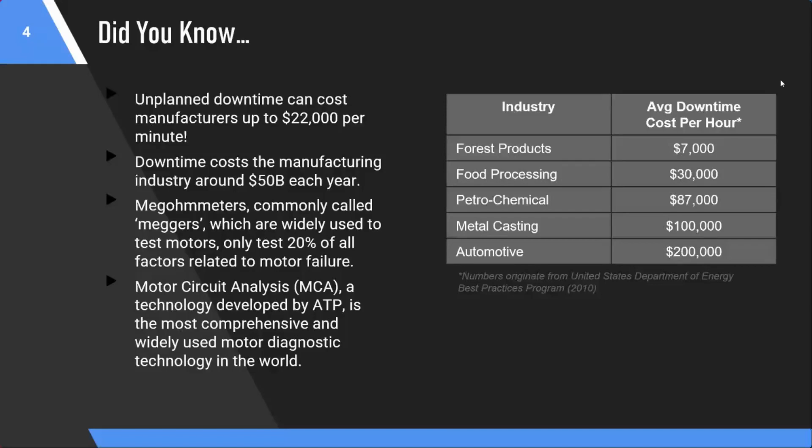So why test motors? Well, as we've said, they will fail. And they can fail at the most inconvenient times, as you know. So clearly, troubleshooting is a very key area that we like to address. It's a common entry point, but there are other areas that are really critical to your business that you may not have potentially looked at. And one of those areas is incoming inspection. When you receive motors that are new or perhaps repaired, testing those motors first can be really, really valuable.

Then obviously we have our PdM condition monitoring program. Many facilities are looking for the benefits that type of program gives. And then we have the whole area of actually improving the commissioning process when you're putting in or taking out motors into your system. We're also looking at some really important cost savings that you can have with regards to energy usage. You've also got the important area of health and safety for your people at the plant. And those areas are all really critical and all have a huge payback to your business.

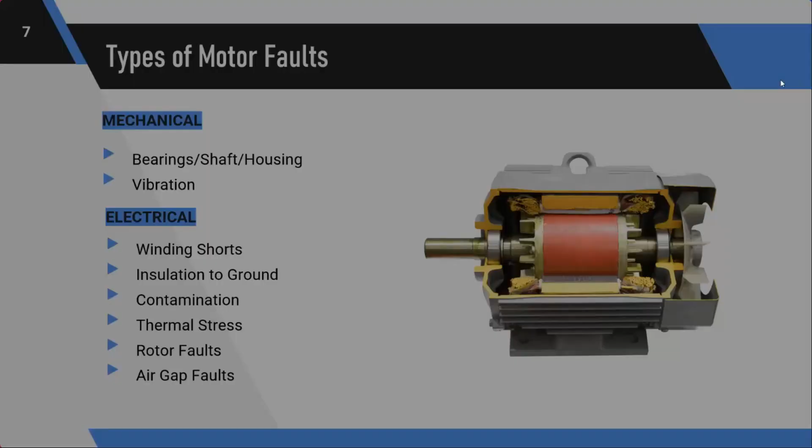Now, when you get to the electrical side of it, the standard that many facilities have been operating with has been the good old insulation test, because really at many facilities, the primary focus there is: is that motor safe? So the insulation test, the ground wall, is a basic safety check, but that doesn't help you in finding those core-to-coil, turn-to-turn type faults. And that's where motor testing using motor circuit analysis that the AT7 is using is really going to help you.

So we can see with MCA, as I said earlier, core-to-coil, turn-to-turn type faults and phase-to-phase. And we can also do the insulation test, so we can see ground faults as well.

So this chart here gives us a good flavor of what is done at many facilities. And as you can see, the green gives you an indication of an early developing type fault. A yellow indicates that it's a late stage fault. And you can see that there's a lot of areas where you are really missing out on early stage information.

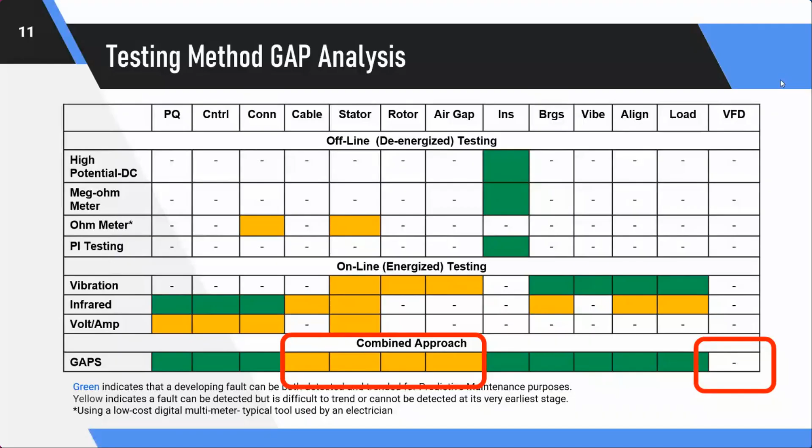Now, if we go to the method where we would be using both de-energized, that's MCA, motor circuit analysis, and electrical signature analysis, all of a sudden we have a larger area of early fault finding. Now, if we focus in on the MCA line, here you can see that we can look at connections, cables, we can look at the stator, the rotor, air gap, and so on, and see these early stage developing faults.

Now, that's something that you're not going to be seeing with your insulation tester, and it's certainly something that if you're using polarization index, PI, and so on, it's not going to do anything for you with regards to those developing core-to-coil and turn-to-turn faults. Really, they are very much looking at the ground wall insulation. So MCA, right out the gate, gives you this developing information.

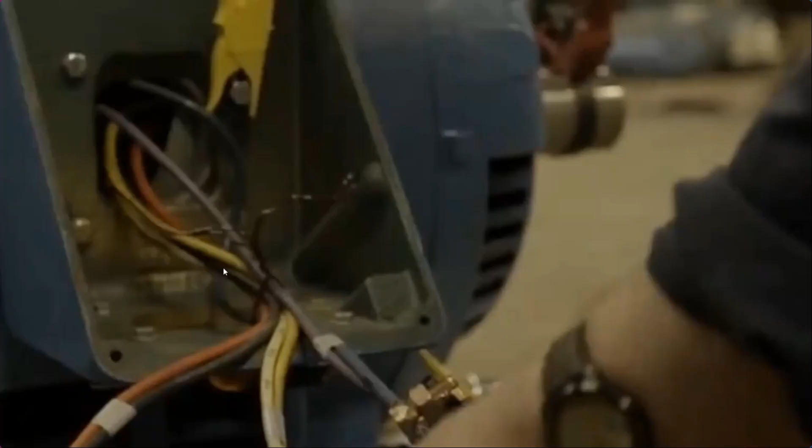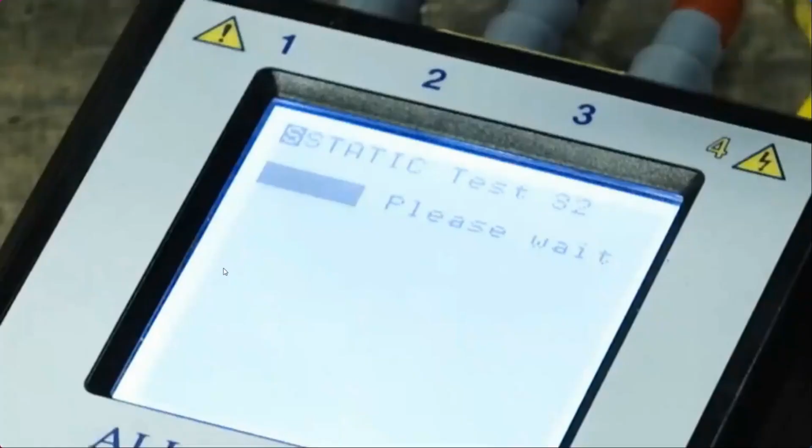Okay, you may be wondering what the bloody hell was that? And that was just a little wake up, because it can get really boring having to listen to someone droning on. So hopefully you weren't too offended by that, but you know, you've had a long week, and I just wanted to make sure that you were feeling refreshed and awake.

So after that, we're really drilling down into what we're doing with the MCA product. And our main testing instrument is the instrument called the AT7 Pro. And the AT7 Professional is, as we said earlier, a handheld battery operated device. So this is truly a field testing device. It's light. I can use it out in the field, and I don't have to plug it in. I don't have to have a cart. I don't need to have any software with me. I don't need a computer. It's a fully functioning device on its own.

And we're using motor circuit analysis, MCA testing, which covers resistance, impedance, inductance, phase angle, current frequency, our secret sauce, which is test value static, known as TVS, and also our dynamic stator and rotor. And what we're able to see, as we mentioned earlier, are those developing core-to-coil, turn-to-turn faults. We can see connection issues and so on. And we'll explain and show you how the tool works a little bit later on.

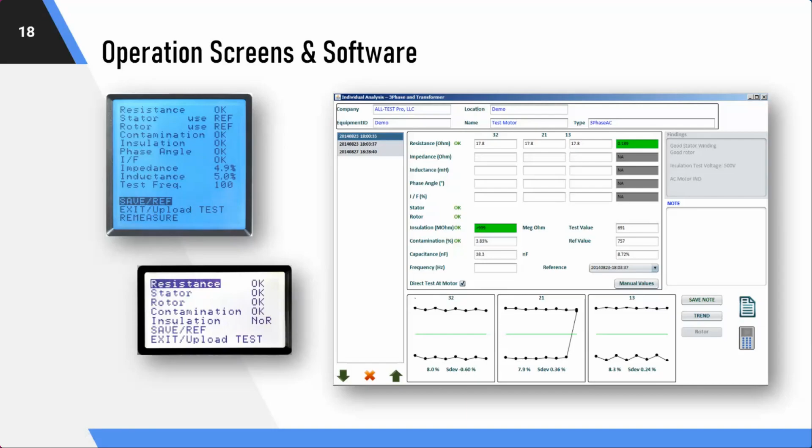Okay, so I'm going to pause here for a second. We have a great software program we'd like to show you, and we'd like to show you how the instruments are actually working. So I'm going to stop with the PowerPoint for a second, and we'll shift over to the camera. Okay, and hopefully you should be able to see the camera. Okay. Yep, your camera's on, Simon.

Great stuff. Okay, well, just an introduction. This is Andy, and I'm Simon. Andy obviously is clearly the more beautiful one here, and speaks with a much better accent than I do.

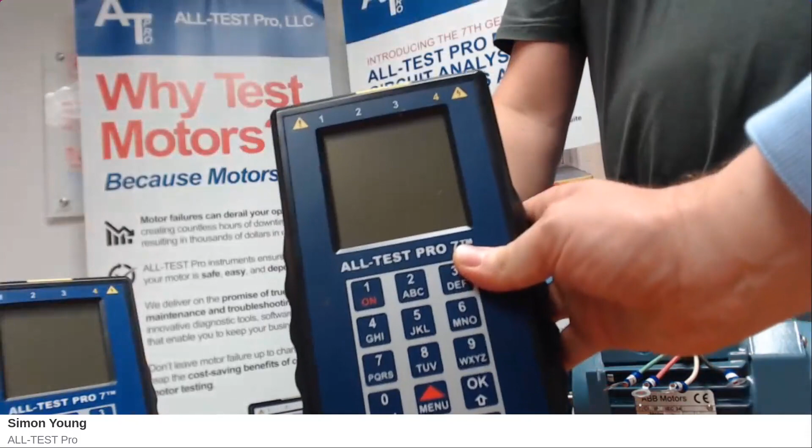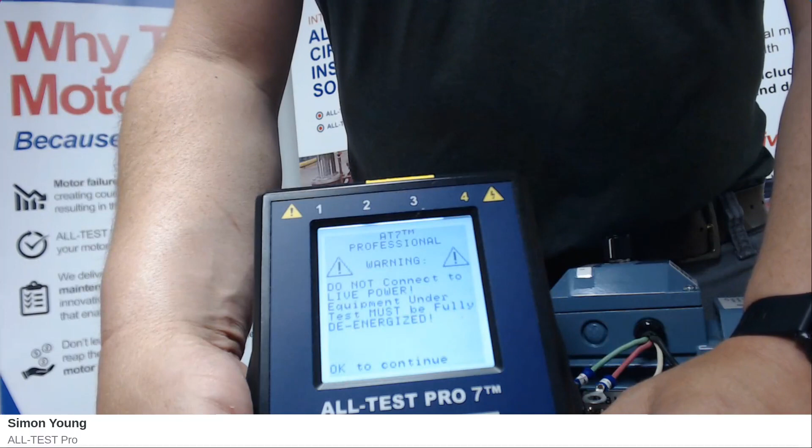Okay, so looking at the instruments here, this is the AT7. And as we mentioned earlier on, it's battery operated. It uses a lithium-ion battery pack, so you get a good day's work out of the tool. When you turn the instrument on, the first thing that you're going to see is the warning not to connect this instrument to live power. And you're also going to see that it tells you that this is the professional version of the AT7. And what that means with the AT7 Professional, it's going to give you the ability to test AC motors, DC motors, transformers.

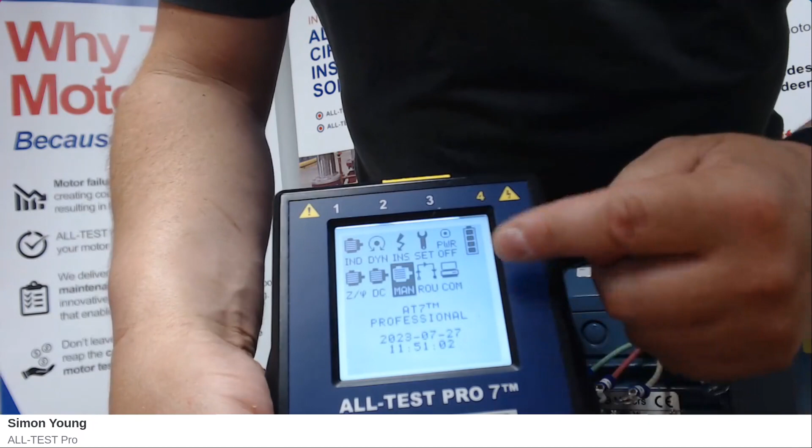It's also going to give you a route function, and it's also going to give you access to a work order function in the software. And this, as I mentioned, is our main full instrument. Okay, so when you click OK, the screen then presents to you the main menu options, and you'll see that the icon on the top left there is highlighted.

So the navigation for the tool is basically via the keyboard, and you can use the up and down, left and right arrows to actually navigate through the screen. So if I hit the down button here, you can see I've actually moved down to the Z/φ test. Okay, so when I'm looking at the icon that was highlighted, what does that mean? There's a picture there of a motor, and underneath it, it says IND.

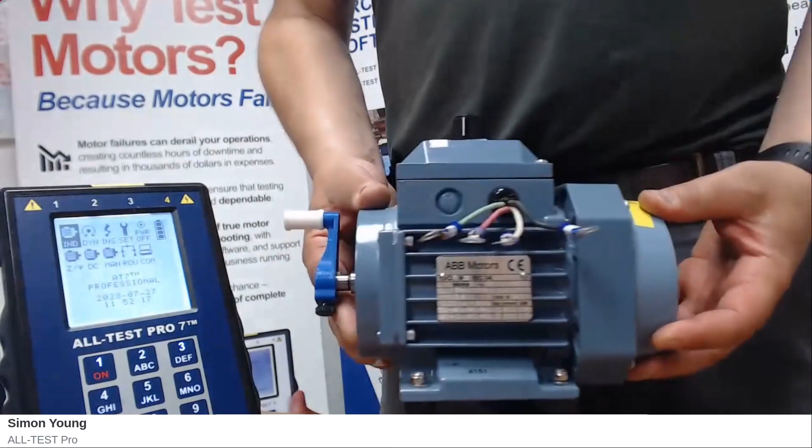Well, the IND test is optimized for testing the most common motors that are out there, which are the AC squirrel cage induction motors that are less than 1,000 volts. If I'm going to be testing something over 1,000 volts, then I would move to a different test option, which we'll get to in a minute. But basically, we have here a little fault motor that we're going to be using for today's demonstration. And this is obviously a squirrel cage motor.

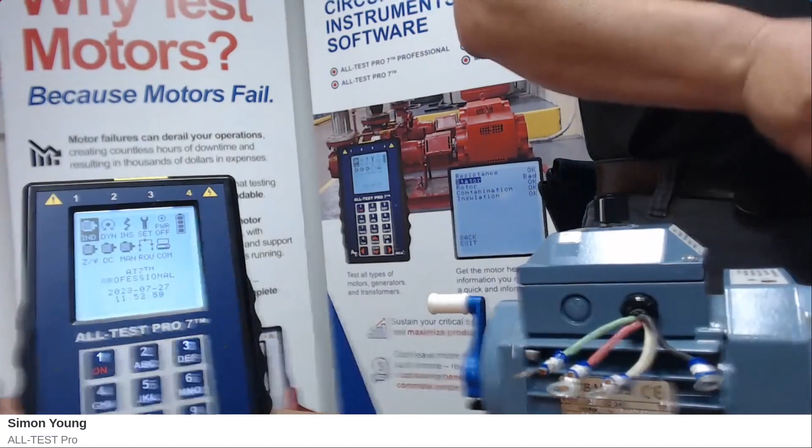Now, we have played around with this motor to give it some basic faults. So that gives us the ability in a conference or this type of environment to actually show you what's going on. But the principle is exactly the same out in the field. So we're on the IND test. We're going to click OK. And now you'll see that the screen is giving us an onscreen message prompt, and it's asking us to connect the blue clip, which is the phase 2 lead, and the yellow, which is the ground lead.

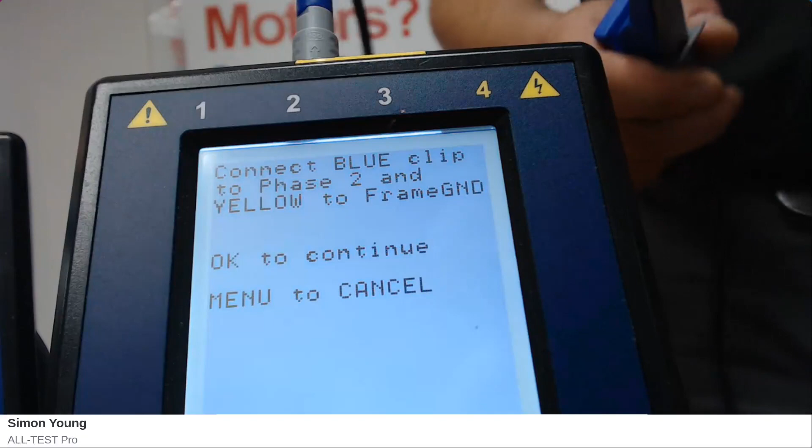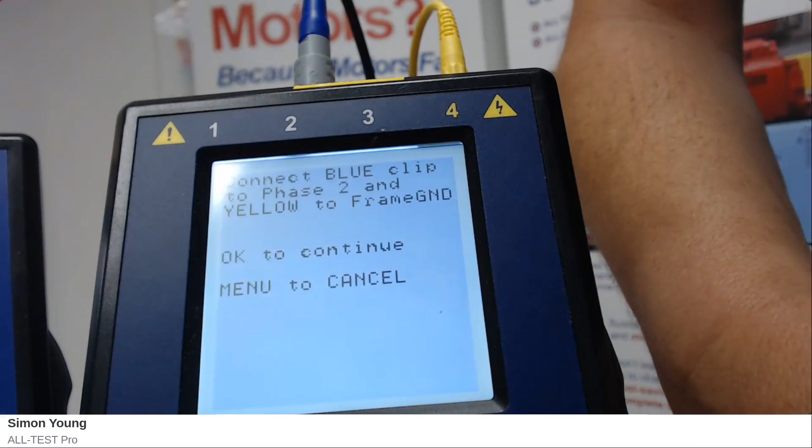Now, this was a great improvement over some of our older instruments where they only used to have 2 phase leads, and you would have to move those phase leads from one set of connections to another and keep repeating that until you completed the test. Now, I'm pleased to say, with the type of Kelvin bridge resistance measurement that we've got in there, we are able, once we've made our full connections, to leave those alone during the actual motor test. We don't have to move them around, which is wonderful. It saves time, cuts down on connection errors, and so on.

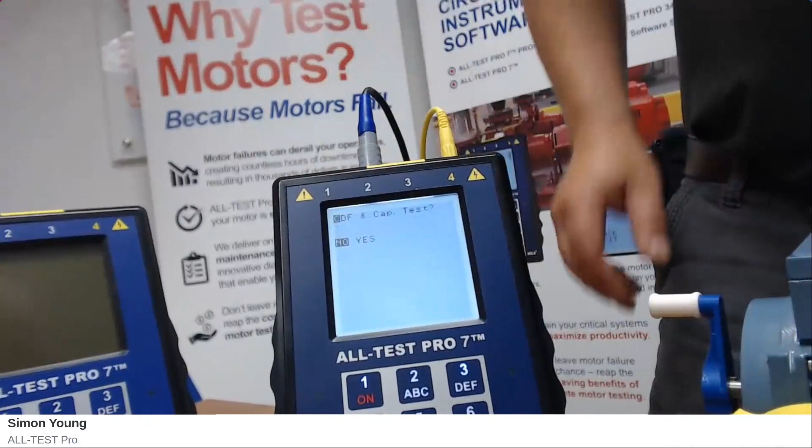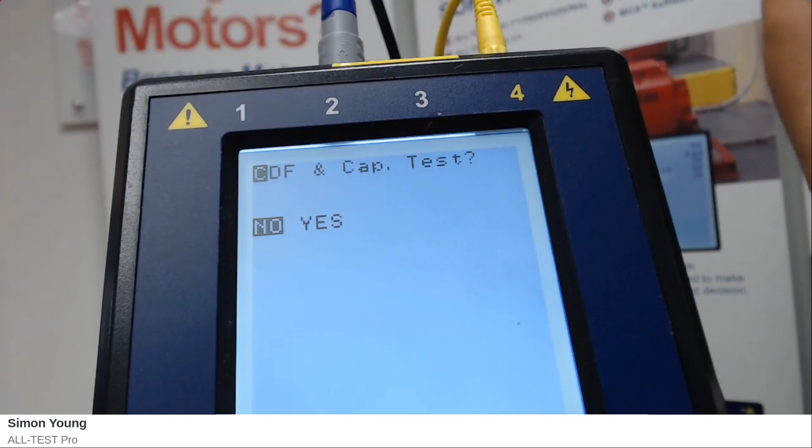So we're now at the point where we're ready to hit OK, and straight out the gate, again, you'll see that the instrument is guiding you. It's advising you that we're on no. We're presuming you don't want to do this particular test. Now, the test that we're doing at this precise moment is our dissipation factor and capacitance test, which we use for establishing contamination. And we perform this particular test directly at the motor. Okay, so we're going to say yes, because we are directly at the motor. Oh, okay, we'll just redo that again.

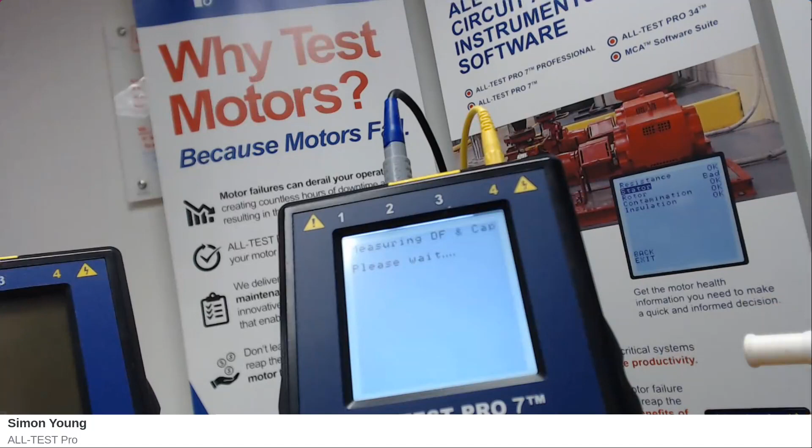Okay. And now we're carrying out the capacitance and dissipation factor measurement. You'll see there's a yellow light on. That means we're injecting a signal into the motor. We've got our results there on the screen. And for an experienced user, we have the DF number there, which is 3.28%, and the capacitance number, which is 37.05 nanofarads.

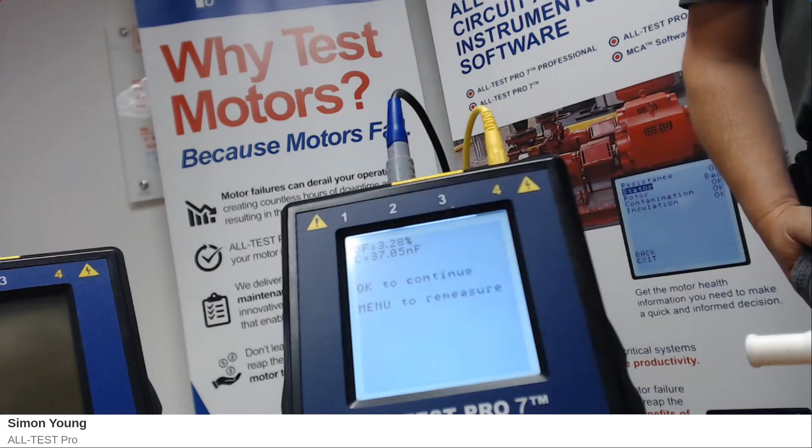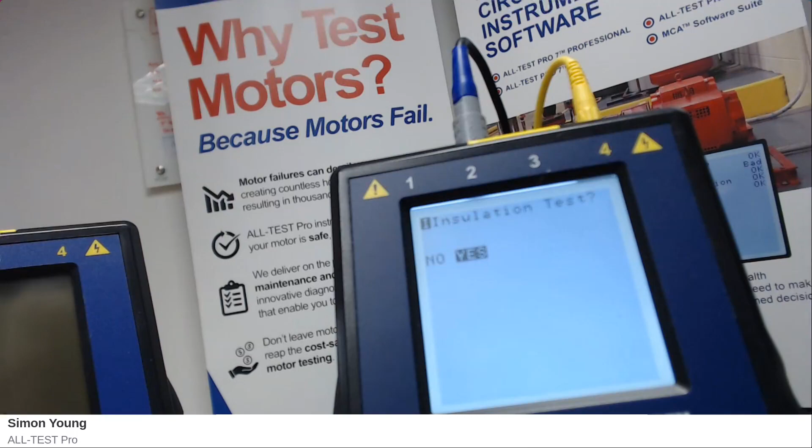But for the more basic user, you don't have to worry about what those numbers are actually telling you at this precise moment, because at the end of the test, on the screen of the instrument, it's going to give you the summary, the test results, in a very easy to understand and logical way. So we've got some measurements, and we're now going to click OK. So again, we're now being asked by the instrument, do we want to do the insulation test? And obviously we do. So we're going to say yes and click OK.

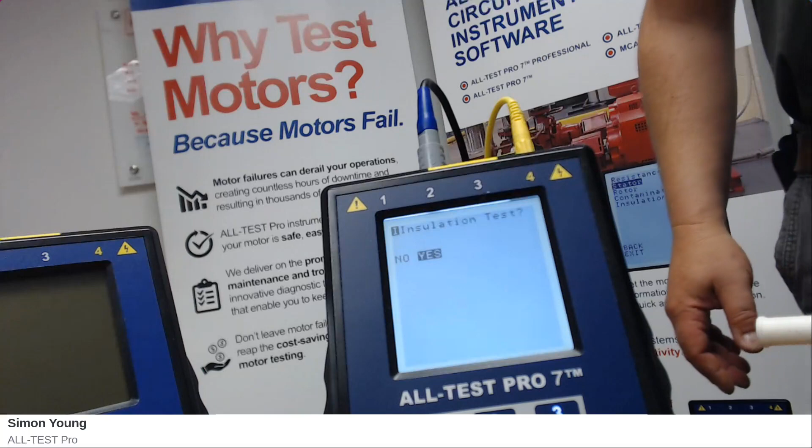It might be worth noting, this is the insulation to ground test. This is our safety test. This is not the winding. There's 2 forms of insulation in a motor. There's the insulation to the ground, and there's the insulation within the windings. This is your safety test as we're going through here.

Thanks, Andy. So we have the capability of testing at 500 volt or 1,000, up to 5 gigs. Since this is a safety test, we could terminate at 5 gigs because under any safety protocol or national standard, 5 gigs will meet every standard. So we know this is a safe motor to run now.

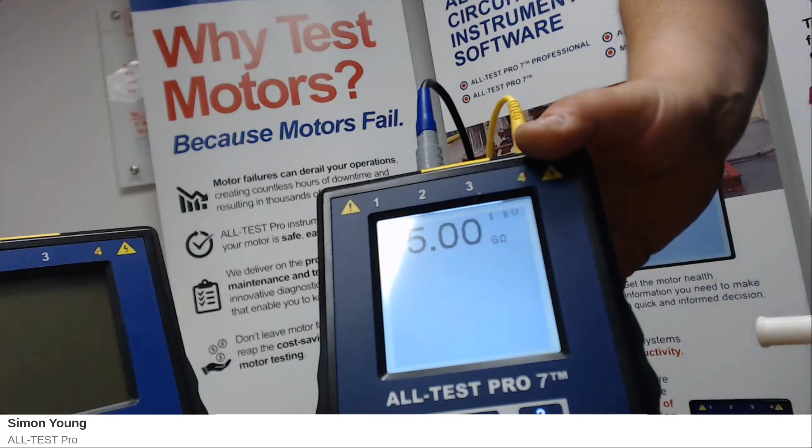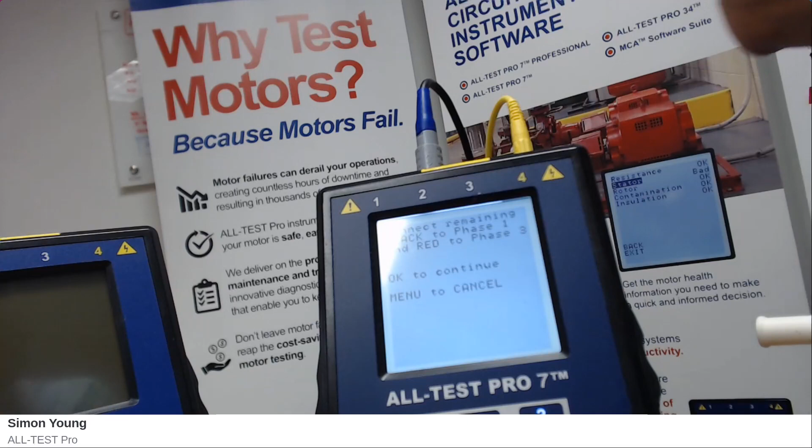Simon? Okay, so now we're going to click OK to lock that in. Now, before we hit OK, we had the ability to retake that test if we wanted to, but to actually lock it in, we had to hit OK.

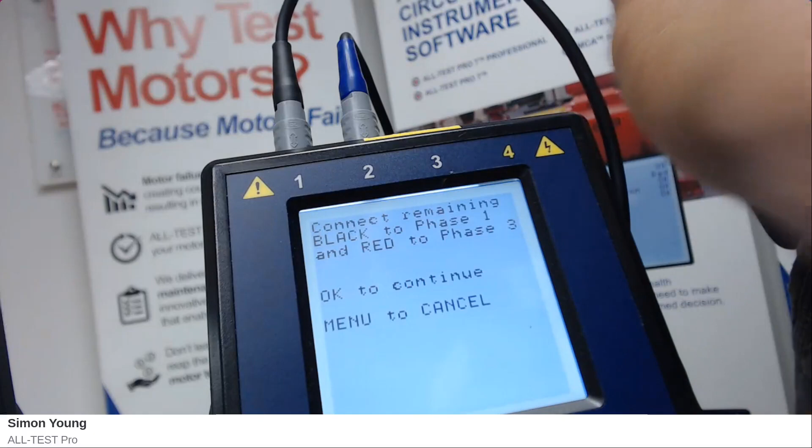Now we're on to the next stage of the motor test, and as you can see here, the instrument's actually asking us to connect the remaining clips, and that's going to be our black, which is our phase 1, and our red, which is phase 3. And these, as I mentioned earlier, are true Kelvin clamps. It's got a true Kelvin resistance bridge inside the instrument. So we're looking at very accurate measuring. Okay.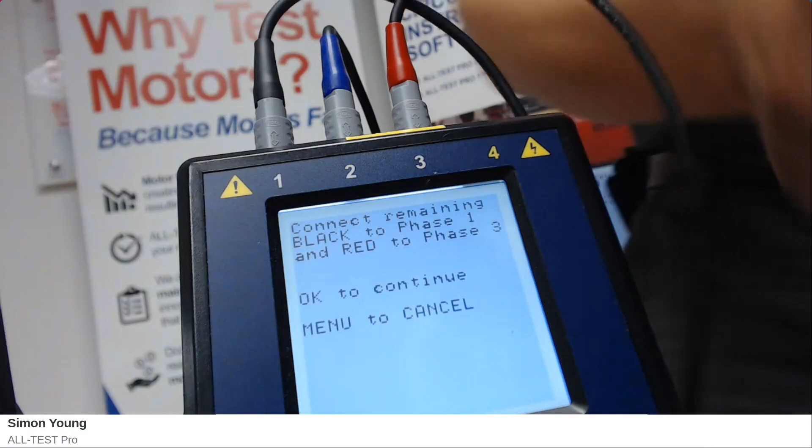So it's very user-friendly. As we continue on with the test, we see that we have a no connection. Intuitively, we correct our connections, and the test will continue on. Yep, that's a great point, Andy. So just to go over that, if you have not made a good connection, the instrument is basically telling you that you needed to complete the connection.

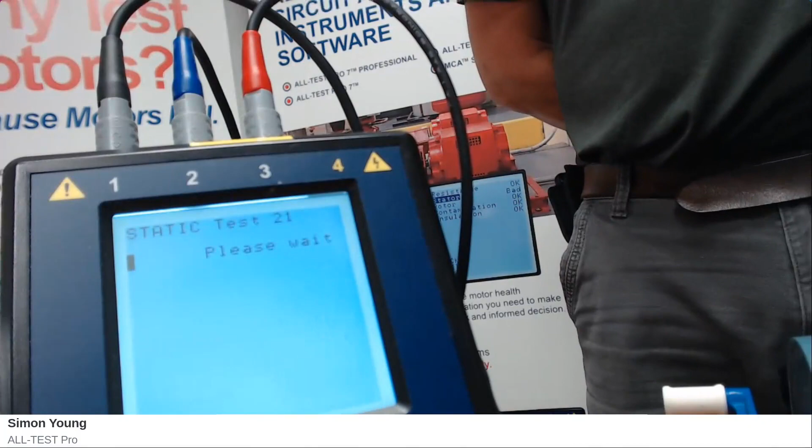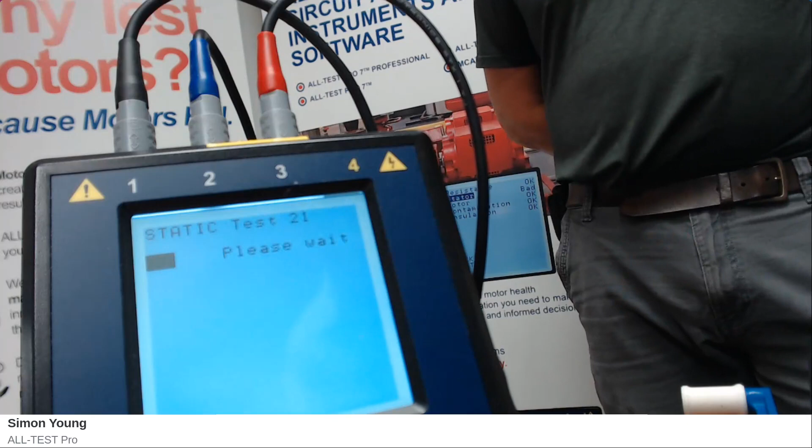Okay, so the light down over here, the yellow light or amber light, is basically indicating that we're injecting our sinusoidal signal into the motor system, and this is not destructive in any shape or form. This is low voltage. So the great thing here is you're able to get information on the condition of your windings without having to over exercise them, which is something that, out in the field, surge testing really is something that we don't want to be doing.

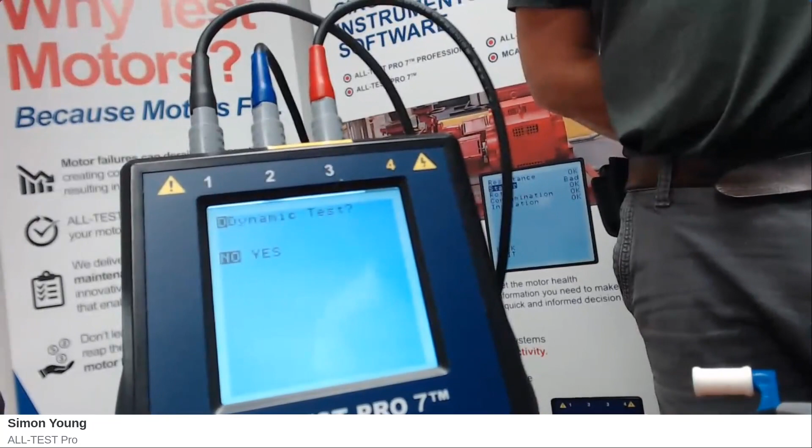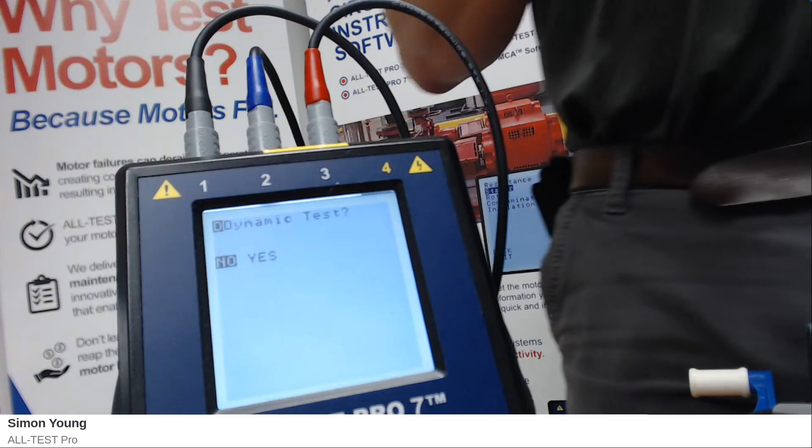So I think we forgot to mention, but we're mimicking a brand new out of the box initial test right now. We're essentially getting our baseline for our system, understanding what the motor is good out of the box before we install or we store or we move on, or if we find issues, we return it within the warranty period. Simon, we're on to dynamic.

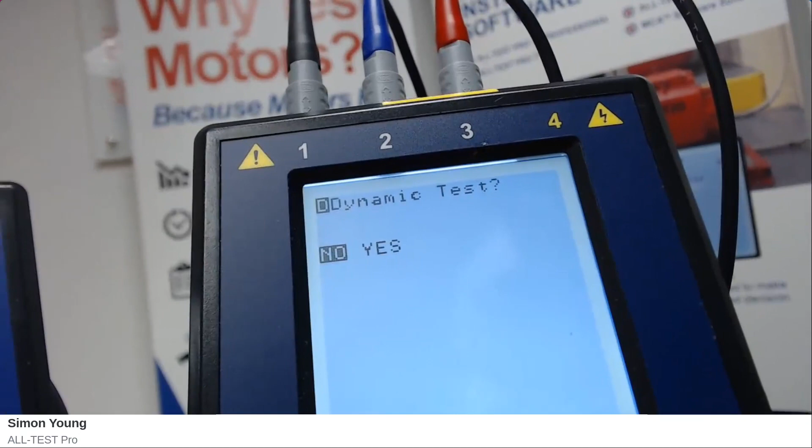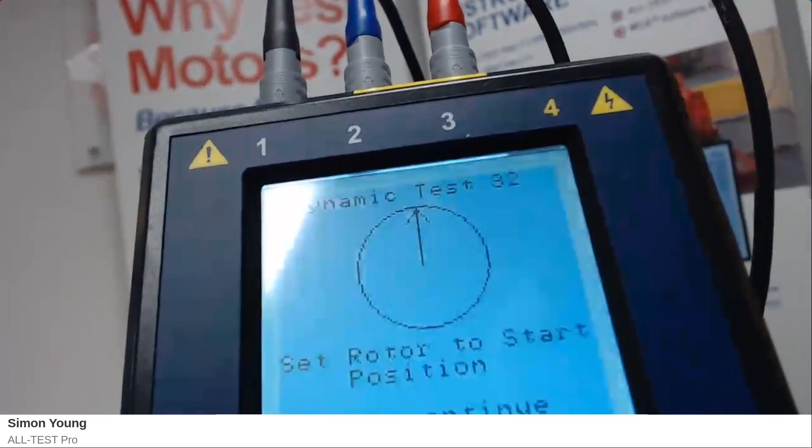Yes, yeah. So now at this stage, the instrument is asking us if we want to continue on and do the dynamic test. This is, as we just mentioned, a brand new motor that we're testing in the scenario. So what we're going to do here is we're actually going to say yes. So we're going to click over here, click OK, and you'll now see that the instrument is ready to perform the first part of the dynamic test. And he's got the rotor at the 12 o'clock position. And so now we're going to click OK.

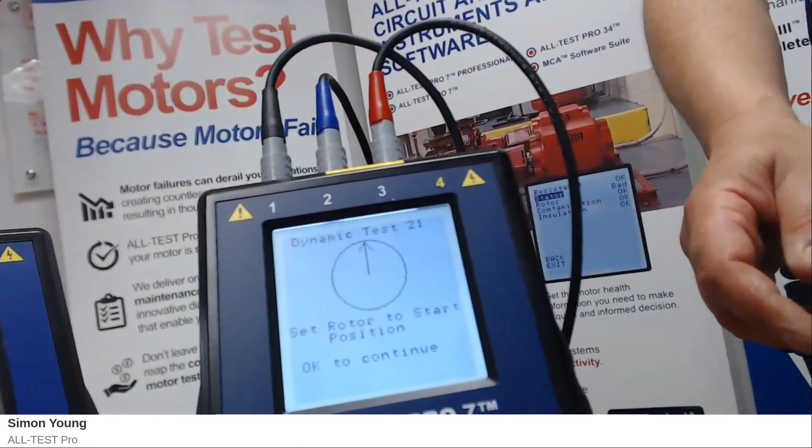And we're going to rotate at a steady rotation speed. And you'll hear, if I stop talking, that there's an audible timing tone to assist you on taking the dynamic part of the test. Now, what we're actually doing here is we are looking at the stator and the rotor in more detail, and this is going to give us a complete test that we can use as a baseline, as a reference test going forward. So now we're ready to do phase 2 to 1. So I'm going to click OK. And it's at the 12 o'clock position.

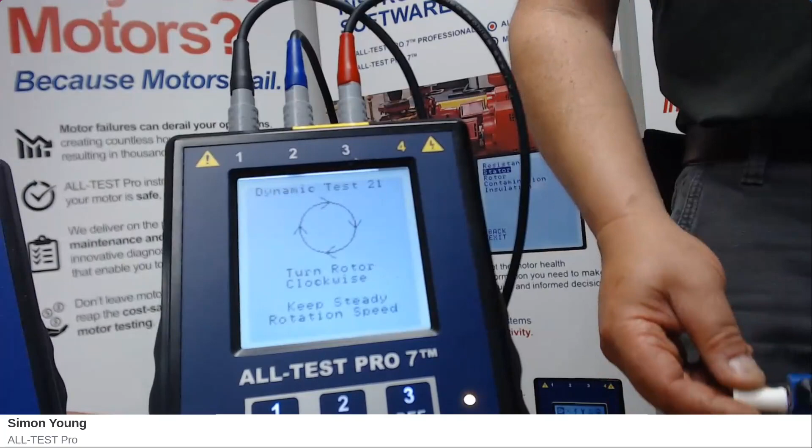And this test is based on poles or RPM of the motor, and we have rotational guidance based on that. So this motor we're conducting a test on is a 3600 two-pole motor, so this is actually our fastest cadence we will spin the motor at for rotor and stator signatures. As we go to 4-pole, 6-pole, and 8-pole, we would actually spin slower because there's more poles to get test data on.

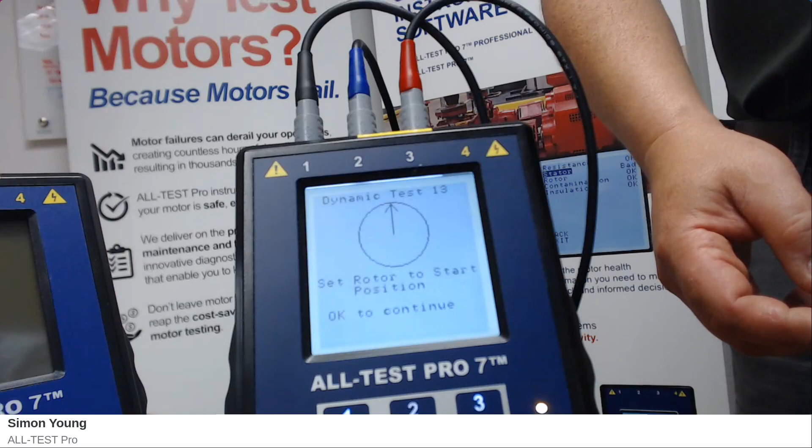Okay, now we're ready to carry out the final phase of the testing. So that's phase 1 to 3 that we're going to do. Again, click OK, start the rotation. So the testing time, you can play this back, it's under 3 minutes to do the complete test. Now, the really excellent thing about this baseline that we have here with our reference test is future tests can be carried out by comparing a static test to the saved reference test. And we'll explain that in a minute.

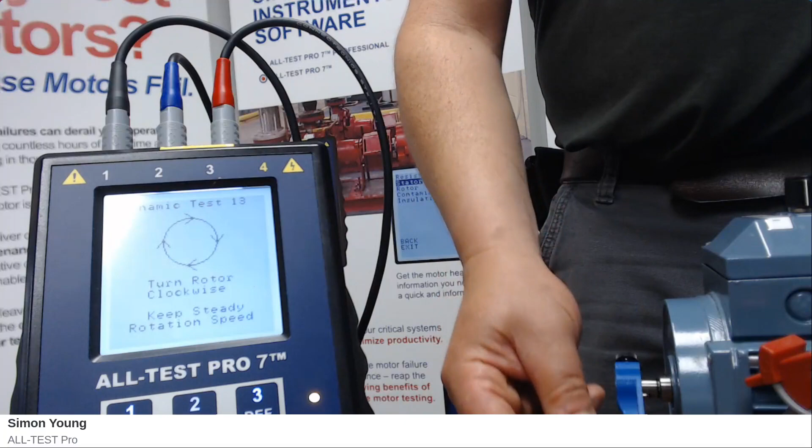So here we go. So as I mentioned earlier, the screen is displaying the summary results for the motor test. And the key thing here, if we're looking at this scenario as being a brand new motor that we wanted to do acceptance testing for, as you can see, this is pretty straightforward for, say, a store person to actually be able to do this for you. And we've got a good result on this. So the first thing that we're going to do is actually save this test.

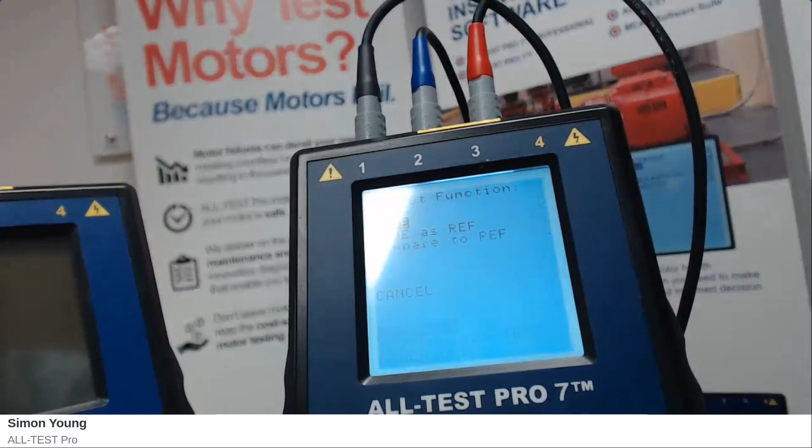We want to lock this piece of information in. Save it as M1, Simon, please. Yeah, M1. I will. So I'm going to save this as a reference. You can see that I've got various different options on the save. So I click OK here, and I'm going to type in the M, and then I'm going to change my

characters. You'll see the ABC at the top is going to change to numerical, and then I'm going to put the 1 in, and then I'm going to move my up arrow to next. You'll hear that beep. You'll see that next is highlighted, and now I'm going to click OK, and that saved that test into the instrument's memory.

Now the great thing there is the instrument will store over 500 tests in its memory, and obviously you can upload this data into the software program, and then you can begin to trend and evaluate information as you take it. Now, out in the field, you may want to look at this in more detail.

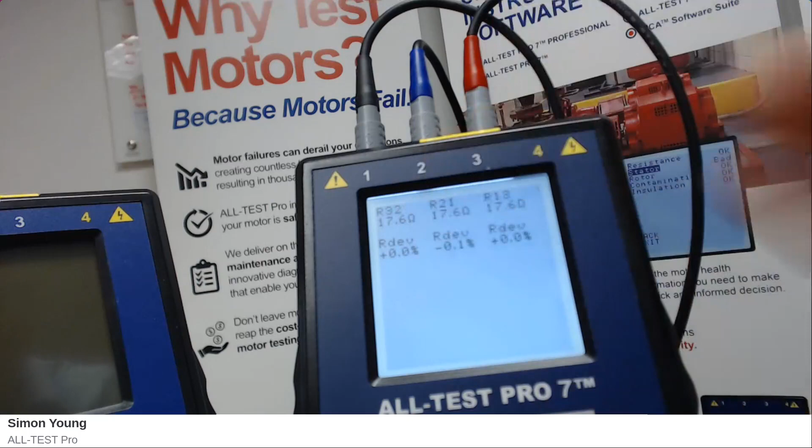So you can see by clicking OK on the resistance measurements, you can actually see across the different phases the actual resistance measurement. And what we're looking for, for a balanced motor, are like-for-like numbers. So basically within the instrument, you don't have to set any of the alarms.

They've been preset in there, but we have a variance for coming up with a warning, so 3 to 5%, and then over 5% we would be coming up as a bad, which would be indicating that we have a significant variance on the measurements.

Okay, so if we come down to our stator, here you can see that we have got our basic dynamic signature here, and this will be displayed also on the software test report and test data for that particular motor. We have one for our rotor, and then we have our contamination measurements, and then we have our insulation.

Okay. The best part about a three-phase motor is there's 3 separate windings that should be exactly the same. So testing against each winding is the perfect opportunity to make sure you have symmetry and balance. And if you go outside that balance, our calculations will let you know immediately. And that's where we find the developing issues.

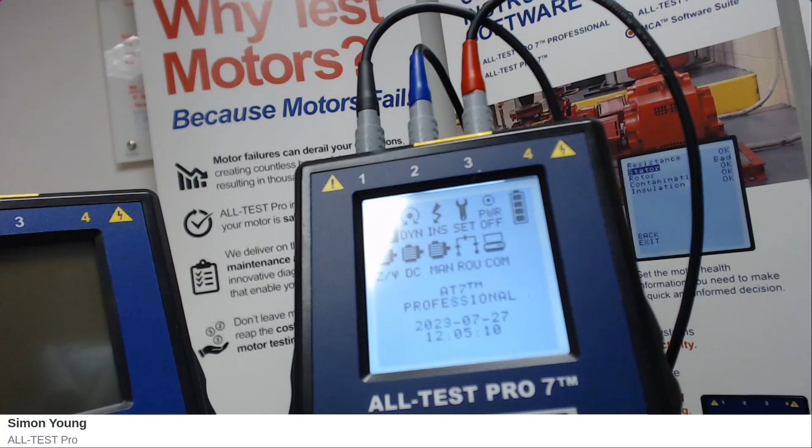Okay, so now we're going to exit out of this particular test, and we're going to change the scenario for a minute here. We're going to be coming back to this motor 6 months later. It was installed when we took that test, and so we're just going to do a follow-up test. So we click into the dynamic test again, click OK.

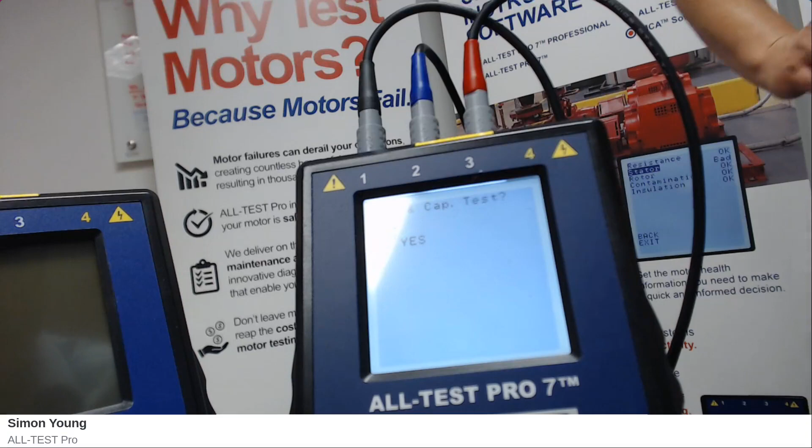This time I'm actually away up at the MCC. So the idea here would be that I want to test with the greatest run of cabling possible, furthest away, to catch any faults on the motor system. So because of that, I'm up at the MCC. I don't want to do my capacitance test.

So I'm going to click OK. And that's just because of the sheer size of the system, it could drain the battery. So that is strictly a motor-at-the-motor test. And then I'm going to say no to the insulation test, because I might have some sensitive electronic equipment actually on the line.

But if I haven't, then I could do the insulation test. But at this point, I'm saying no. And I'm going to go straight in, and I'm going to do the winding test. So you'll see that the instructions I'm being given by the instrument are great guidance for your colleagues who would be using the instrument.

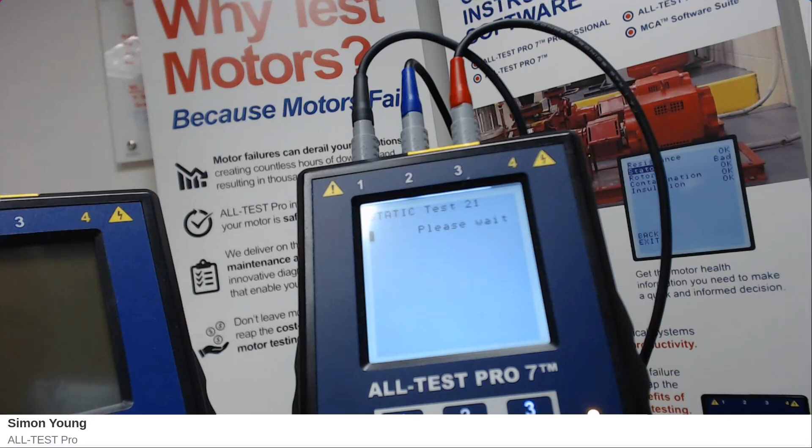So again, while the instrument is doing the test, we're starting on phase 3 to 2, then we move to 2 to 1. You'll see the black bar is working away across the screen. And we're basically testing over a frequency range from 60 hertz up to 800 hertz to get the best frequency response, and then we are performing our MCA testing. Okay, we're almost finished on our final set of phases.

And so when this has completed, the instrument's going to ask us, do we want to do the dynamic test, or have we finished? Now, the great thing here, as I mentioned earlier on, we've got that original reference test that we took, and so we don't now need to undertake the dynamic test. We are going to use this static test and compare it to the saved reference test.

So I'm going to click OK to say no. I've now got the test information here showing. So you'll see that I've got an OK for my resistance measurements.

And if I come down to my stator and my rotor, you'll see that we've got user reference, and then NOR for contamination and insulation. Those mean that I haven't taken those particular sections of the test. So hence, there's no result.

So the first thing I'm going to do, come down and I'm going to save that test, because the data, I want to upload it into the software at a later date. I might want to share it with my colleagues. So it's important that I capture this information. Remember, many of your colleagues that are using a megohmmeter won't be used to saving this type of data. So when, as a team, you're using this type of tool, you really want to educate them on the importance of saving test data. Simon, please name this one MS1.

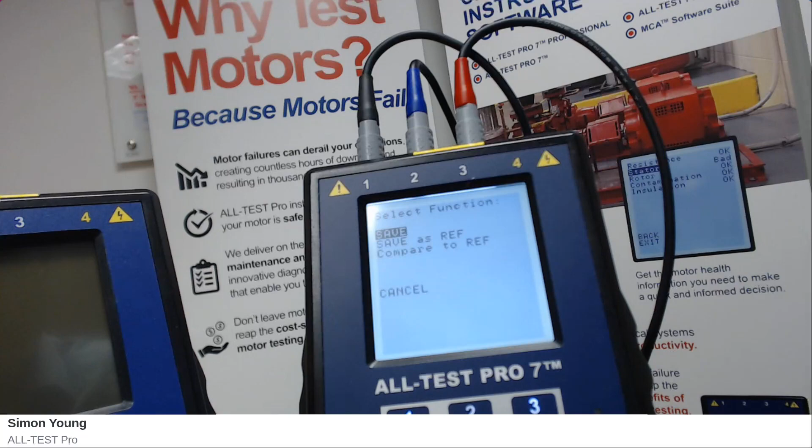Okay, so I'm going to click OK on my save. Now notice this time I didn't go into the reference save, I just went into the save, the basic save. MS1, you say? Yeah. S, and then I'm going to OK, and then 1. Okay, so the same process again. I changed from alpha to numeric, and now I'm hitting the up key to the next, click OK, and I've now saved that into the memory. So that was important. Now I've locked that into the memory, and I've got my test results here.

I can pop down to my stator measurement, and you'll see here it's saying user reference. What the hell does that mean? So here the instrument has calculated out using our patented TVS measurement, and we have a TVS value of 683.05. Well, what the hell does that mean?

Well, if we now come down to save reference, click OK, and instead of going to save, we go compare to a reference, we can now browse the reference memory, and we can find the test that we saved, which was M1. And here we go. You'll see here M1. I'm going to move across to use this test to compare, and here we can see that there's been basically no change in the condition. We've got OK. So right out the gate, out in the field, I've got this ability to compare my new test data very, very quickly to the original data that I took.

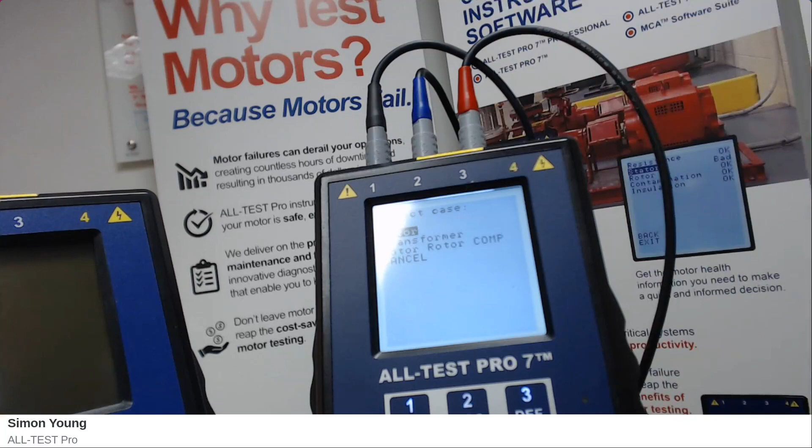And as you can see, the options here are I can test motors, I can do transformers. And with this particular type of test, because I am not using the TVS and the dynamic signature, potentially I've got the option to do what we call a rotor compensated test. And that's an important point to note, that with the industrial test, we no longer have to worry about the influence of the rotor on the winding, because we allow for that with our patented test. So you can take that test as we did from the MCC, and you're not having to worry about the position of the rotor. Now, with the Z-Phi test, here potentially there will be occasions where I will have to do that rotor compensated test to confirm that the rotor isn't causing any form of imbalance on the measurements.

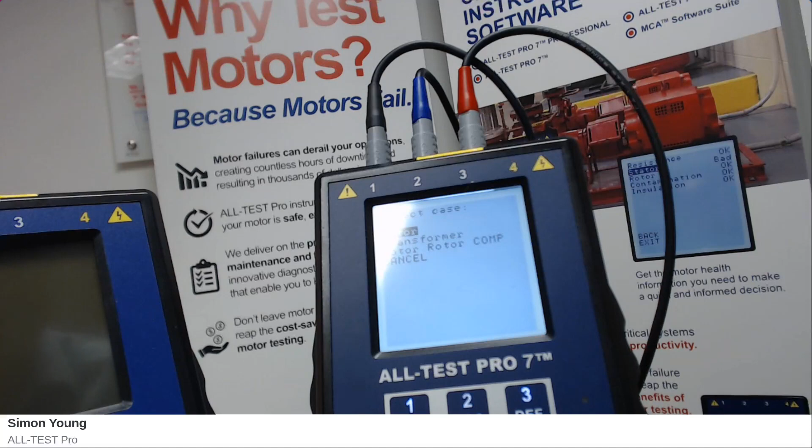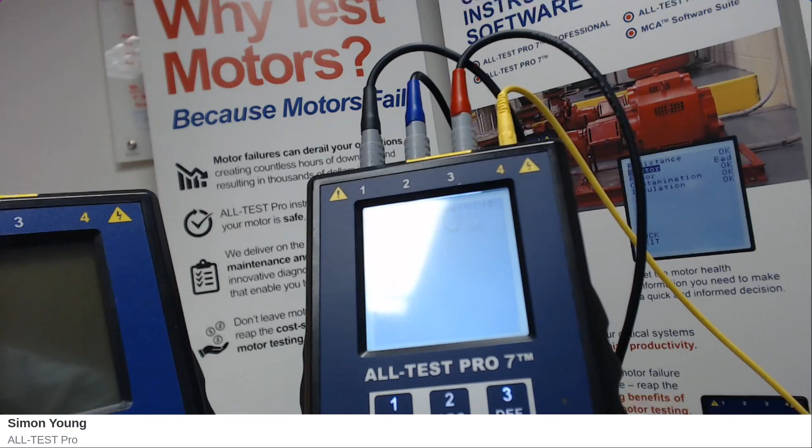So click OK. And the great thing again, you'll notice that the information, the prompts here, the way that we're actually carrying out the test, the instructions are basically the same. So I'm going to take my basic insulation test. So I click OK. Sorry, I beg your pardon, my capacitance test. I'm going to say yes to that. Okay. Okay, I've got my measurements. I'm going to click OK. Going to do my insulation test. Okay, click OK. And now I'm going to take my winding test.

So from a user's perspective, learning how to use this tool, it's very, very easy. Because we have the same basic structure to each test that we're performing, user adoption is very fast. It makes it a lot easier for people to learn the technology.

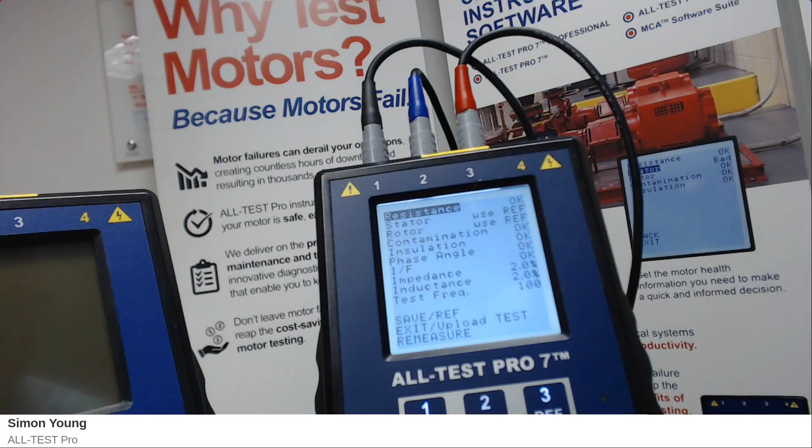It might be a good point to note right now that you notice that resistance is always separate on top. We've found that electrical resistance principles are so robust that, if you're going to have issues, resistance is going to be the last thing to present as a problem before the other electrical principles we do our TVS on. Okay, thank you, Andy.

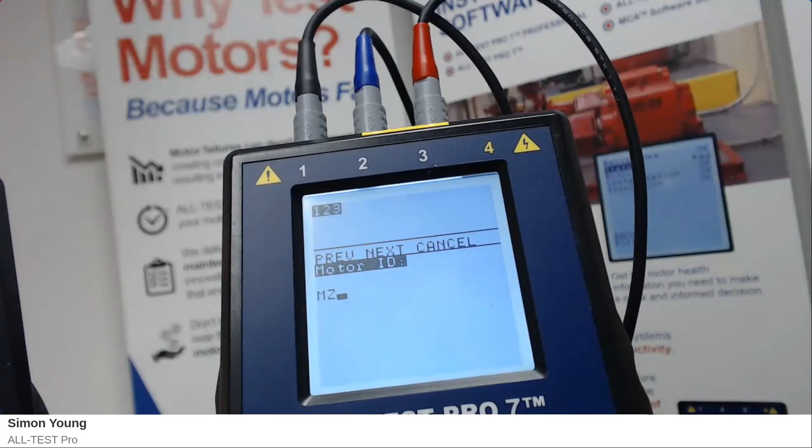Really appreciate that. Now, you'll see on the screen we have, again, our test summary. And as I said, this time we've tested this using the Z-Fi test. And if I follow the protocol, I want to go down and save this test information. So I'm going to click Save. And what one do you want to call it? Let's go MZ1. Oh, very nice. I like it. And then I click OK, change that to 1, go up to there, click OK. All right, so I've now saved that test into the memory.

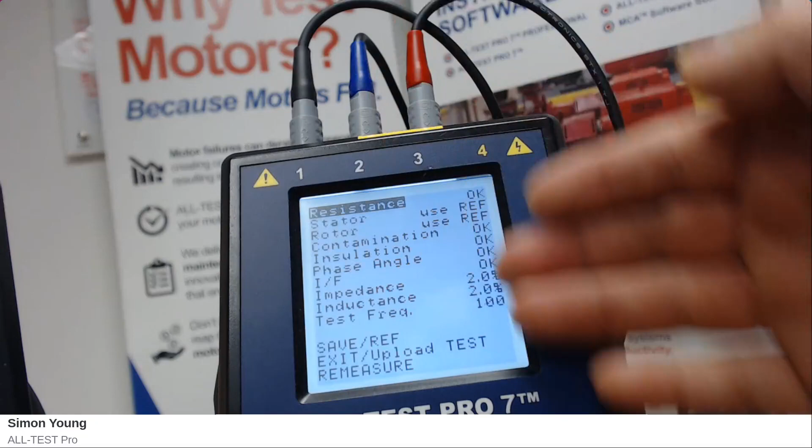Now, you'll see here that I have a range of measurements showing up, but you'll notice that the stator and the rotor say use a reference, okay? So if I was dealing with a potential fault in the winding, then I would expect to see on this particular test the current frequency and phase angle showing as either a warning or bad.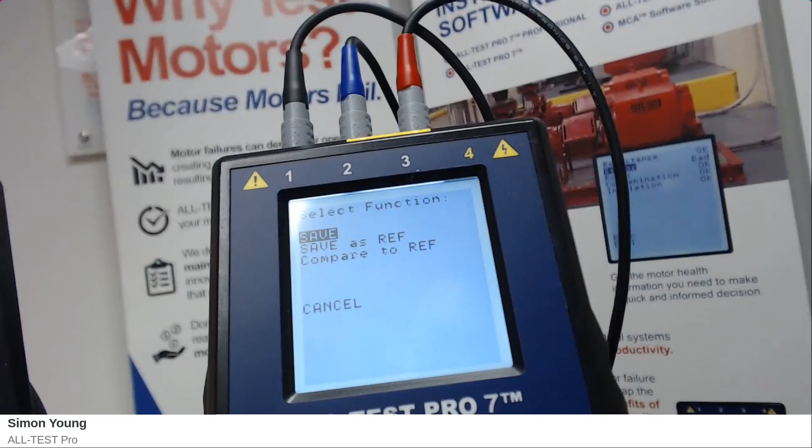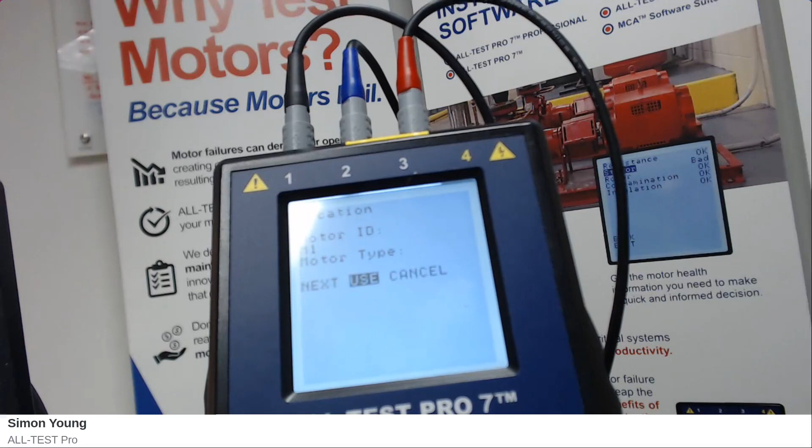But because this is a squirrel cage induction motor and I've got a previous reference test, I can actually compare to that reference test. So that gives me the ability to go down to save as a reference, go to compare to a reference, click OK, browse the memory, and I'm looking for my M1 motor, click OK, and you'll see there that, again, there's been no change in condition of that motor. So I can move on to the next motor that I'm looking to test.

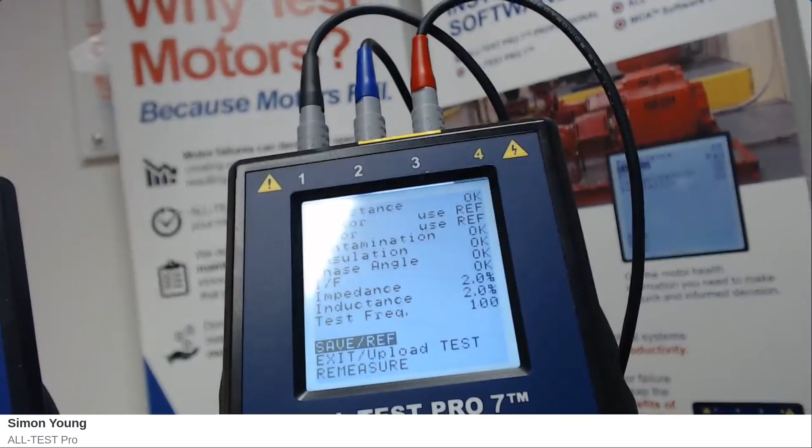Okay, so very quickly, now I'm going to put this into a fault mode for a rotor fault. Yep, rotor stator, yep. Shorted, a shorted winding. Thank you. The brain was not working there.

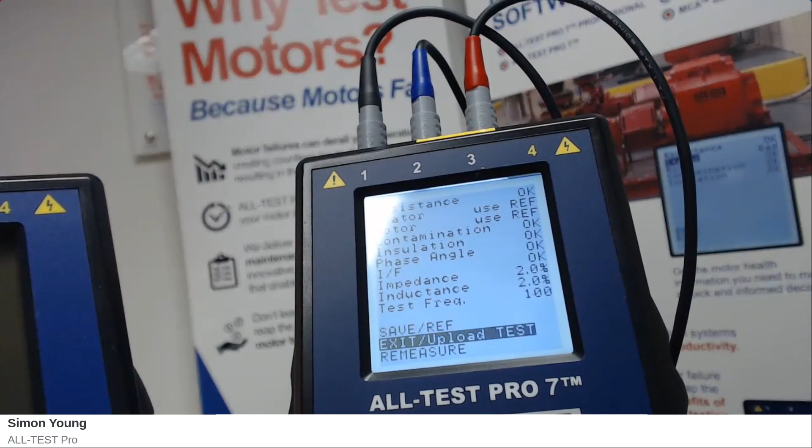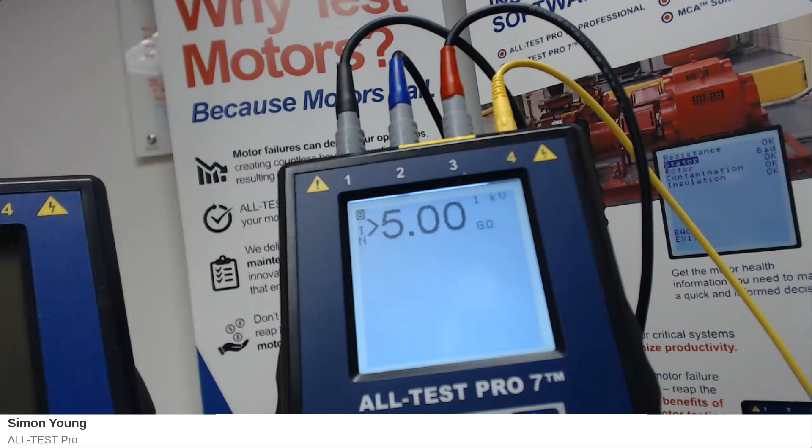So I'm going to now hit remeasure, and I again get the same basic instructions. I'm going to say no to the capacitance. I'm going to say yes to the insulation test, just to show you that you can test a motor and have good ground wall insulation, but you can have, very deep down, a winding fault that is developing. So now I'm carrying out the remainder of the winding test.

We've got about a minute left, I think, roughly. So bear with us. We'll have the result up very, very shortly.

So using the test data in the software program is very easy. We have a basic USB cable that's used to upload the test data. You can create a company. You can create multiple companies if you want. And then under the company, you can create locations where you would put your motor asset in under that particular location. And you can build up your database. It's going to advise you of the condition of the motors, when they're overdue a test and so on. And you can print test reports for management, trend reports, and so on.

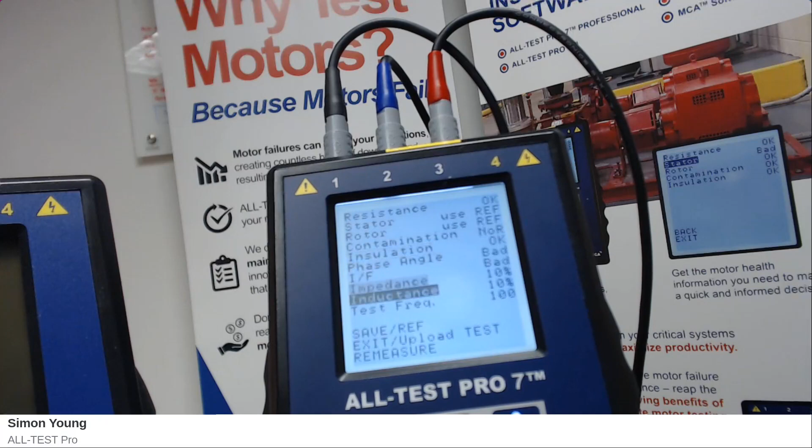So again, protocol, I'm going to save this test. So I click down here, going to save. M4Z or MZ4? Yep, and Z. Whoops. Sorry, that's my fault. Rushing. Oh, that's my fault. I didn't mean to do that. MZ4, you said? Yep. Okay, sorry about that, guys. Okay, come up to next. Click OK. That's now saved.

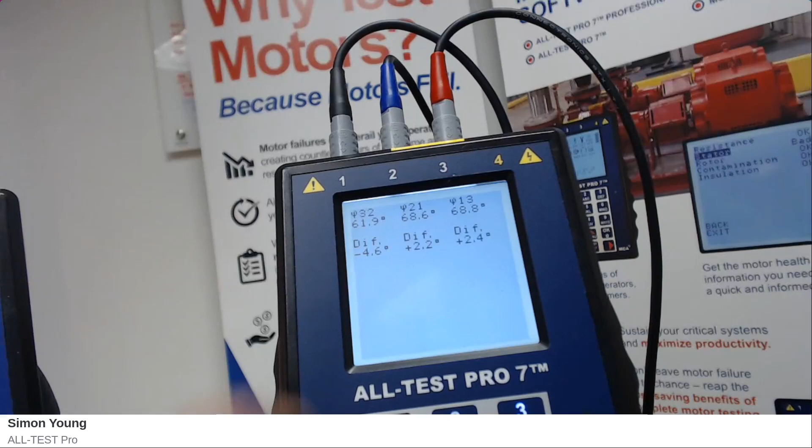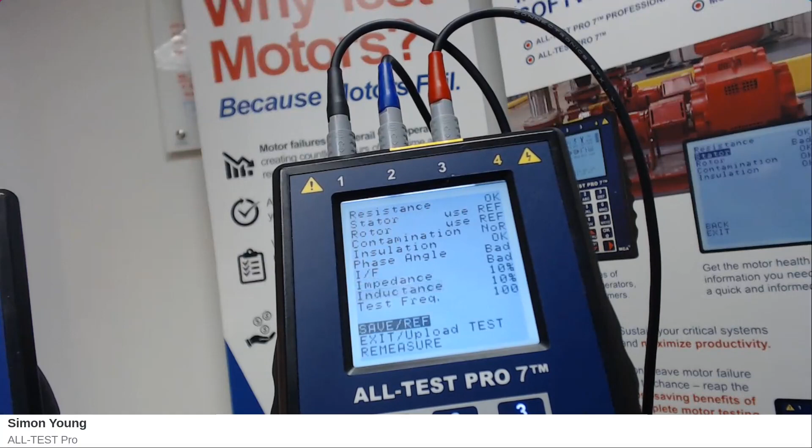All right. So this time you can see on the screen we put this motor into a shorted winding, and we can see that for the stator, the TVS value has changed significantly, and we've also got an indication of an issue here on our phase angle, because we can now see a significant change, and also on the current frequency.

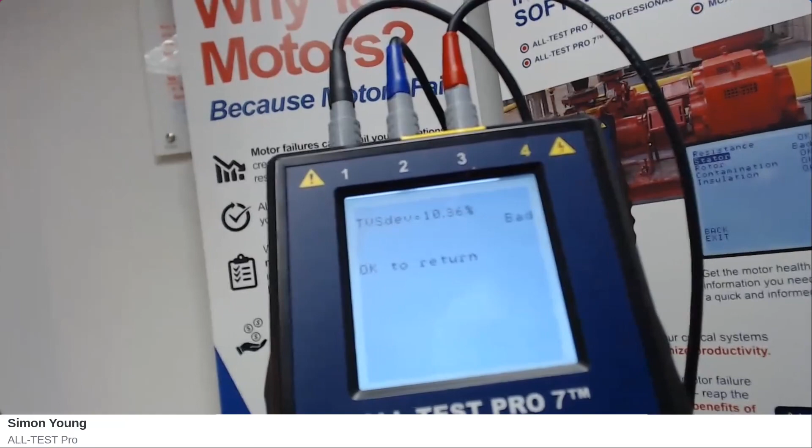So if we now come back down to the save reference and compare this test to our initial reference test, the M1 test, come across, use this, and you can now see that the TVS has, oh gosh, what's the word? It's changed from good to bad, because the deviation has exceeded our alarm limit. So it's over 5% deviation. Compared to our good baseline. Yeah, thank you, Andy. Compared to the good baseline.

So with the software program, we can upload this test information. Each test is time and date stamped. The software program has the ability to add photographs into a particular test. So there are lots of uses for your motor program, where you can maybe argue for purchasing a higher quality type of motor, or maybe you want to share data with another facility.

So that really gives you a lot of strength. So the areas that we were trying to cover today were basically incoming inspection, your backup spares, all of those motors in there. You can very quickly survey and get a good handle on the condition of those motors. Then you would be using the instrument at the point that you're changing out a motor, at the point that you're condemning the motor. Is that motor really the problem? So you would test, you would verify that that is the problem, and then you would test the new motor you're installing at the point that you're swapping out.

And then further down the road, you have the condition monitoring, PdM type of program where you can build up a good control of where your system actually is. And then finally, goes without saying, basic troubleshooting. Maybe you have VFDs on some of your motors. The VFD goes into a fault mode. Do you call out the drive specialist? Well, if you have one of these motor testers, you have the ability to really verify, has the sensitive drive picked up that there's actually something going wrong with the motor, and you can verify that you have a developing winding fault using the tester.

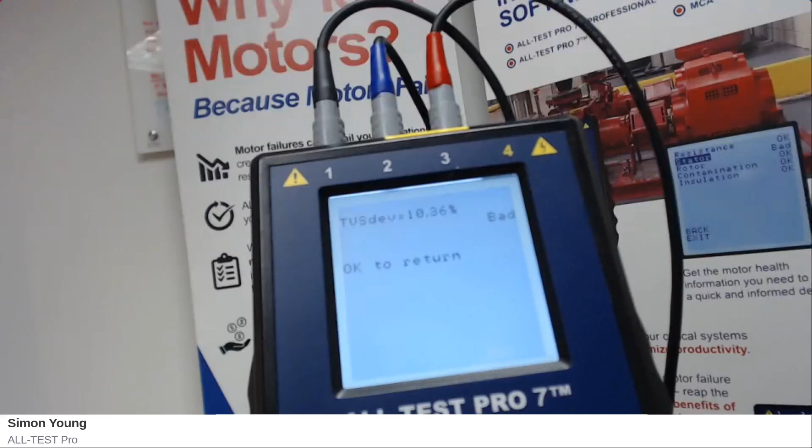So the AT7 really helps you build a better understanding of your motor systems. One final point, the instrument can be used with the AT34. The AT34 has the same industrial test function. And then we have our energized tester, which is the ATOL 3, which in conjunction, as we mentioned in the PowerPoint earlier, gives you that widest range of testing from incoming power, the motor, the driven load. You can really save yourself many hours of pain.

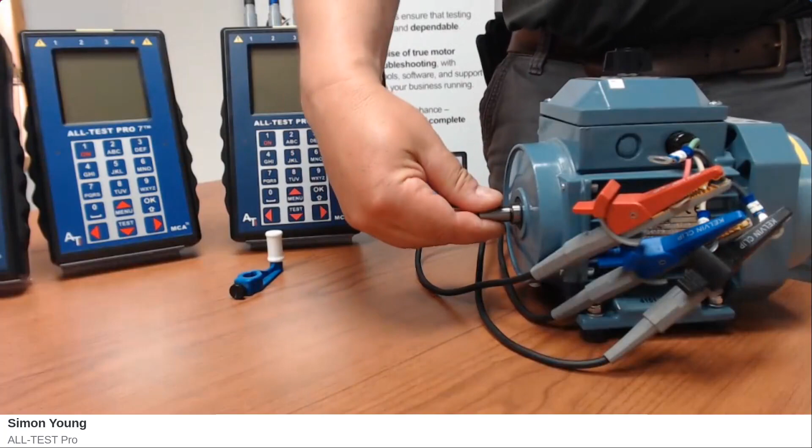And the key thing here is that we don't want you rotating the shaft of the motor with your fingers. We actually have a shaft strap that we provide with each instrument that helps you maintain a smooth and steady rotation. It's actually very challenging to do it by hand. Great question. Thank you very much. Every time you touch the shaft, you essentially stop it.

All right, fantastic. I love that we're able to look at these things live with you guys. It's so much fun.

So moving on here to our next question. This person is wondering, what is the time period for the next test on the same motor? Oh, beautiful. Love this question. So in our manual, we give some guidelines on how often you may want to test. The key thing is that you perform regular testing, and that you've done your survey. So in my book, you get the instrument, you do your backup store, you instigate the program of acceptance testing. Very importantly, you instigate the commissioning process so that you're using the tester in that.

Then really, 6 monthly or yearly is viable, and you're really going to be focusing on that smaller, under 3% of problem areas that you want to test more regularly to evaluate where you are regarding an actual decision to change that motor out.

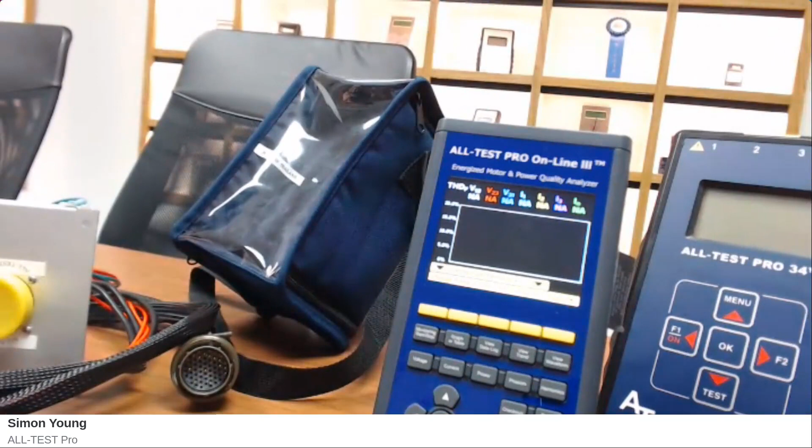So the MCA instruments, so that's the AT34, the AT7, and the AT7 Professional. Those are all de-energized testing instruments. The energized tester is known as the ATOL3, and that uses electrical signature analysis.

That instrument will carry out a full power quality, incoming power assessment, and we'll also look at the running motor and the driven load while under power. But it's important to note the best technology that we have been able to develop to date for finding those developing coil-to-coil, turn-to-turn, phase-to-phase winding issues is de-energized.

And that's why we push the ATOL3 energized tester in with the AT7 Professional in our complete assembly, which is known as the MD3. And that gives you the greatest coverage for finding those early stage faults. It's a great compatible tool with other reliability tools that you'll have in your toolkit. Works great as an excellent counterbalance, for example, with the vibration program and so on.